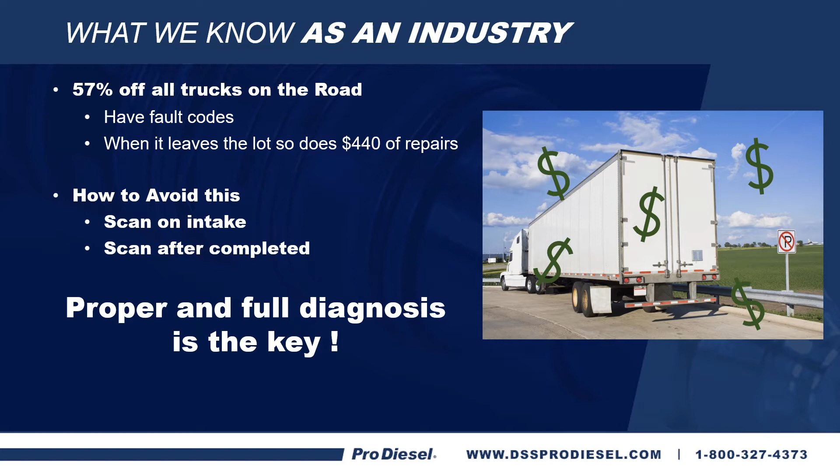One thing we know as an industry is 57% of all trucks on the road today have fault codes. When it leaves the lot, so does $440 worth of repairs - that's $220 in labor, $220 in parts. How to avoid this? Scan the truck on intake and scan the truck after completed. That gives you a full and proper diagnosis, which is key to making sure we diagnose what's wrong with the truck, get to the root cause of the problem, and make sure we're replacing injectors when they need it, not when they don't, and that we've solved the issue that caused the first set to fail.

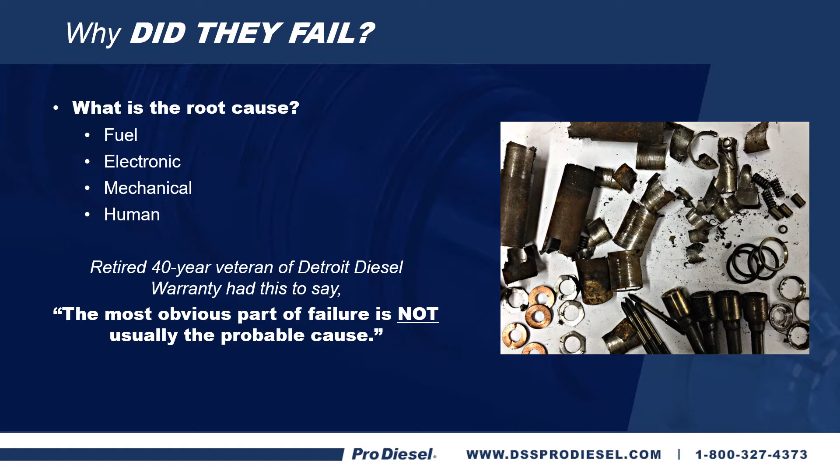Speaking about why they fail, what is the root cause? Is it fuel? Is it electronic? Is it mechanical? Or was it human error? A retired 40-year veteran of Detroit Diesel warranty said the most obvious part of failure is not usually the probable cause.

Why do injectors fail right out of the box? Well, 65% of all our ProVantage warranty returns are non-injector related issues. First, contamination. Second, O-ring damage - they're either cut, pinched, or rolled. They were improperly diagnosed, or it's an inherent OEM injection design failure. I always like to say a Yugo's a Yugo - we can only make it so good, it's still just a poorly designed injector. We can't change the design of that injector. So 3 of these are preventable during installation, and that's what we want to talk about today.

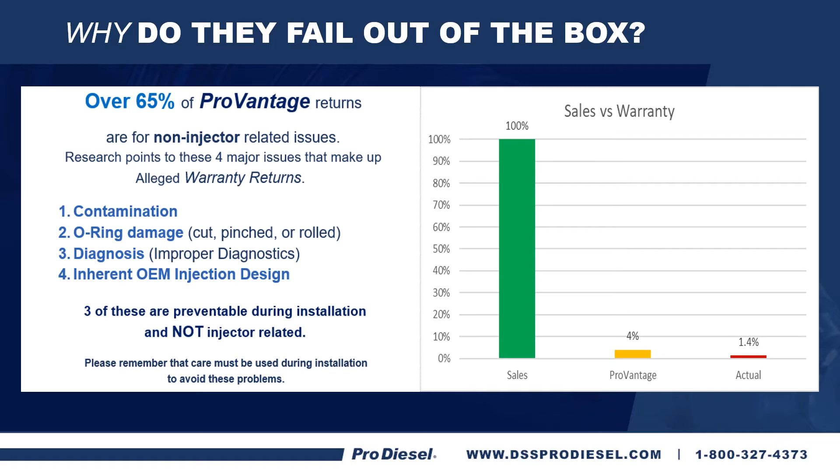What makes up the 65% of returns that we get back for warranty purposes that are not injector failures? 60% of that 65% is contamination.

Under that, let's talk about storage. Do you buy your fuel in bulk? Is it a reliable source? Is it the right type of fuel, highway or off highway? Are you putting the proper additives in it for that time of the year? Particulates - it's critical to remove these through filtering. We have a 5-micron tip in some of the electronic fuel injectors today, that's just a piece of dust - it takes 20,000 microns to equal an inch. Do you have water or microbes and sludge in there? Prevention is the most important part to keeping fuel-related issues out.

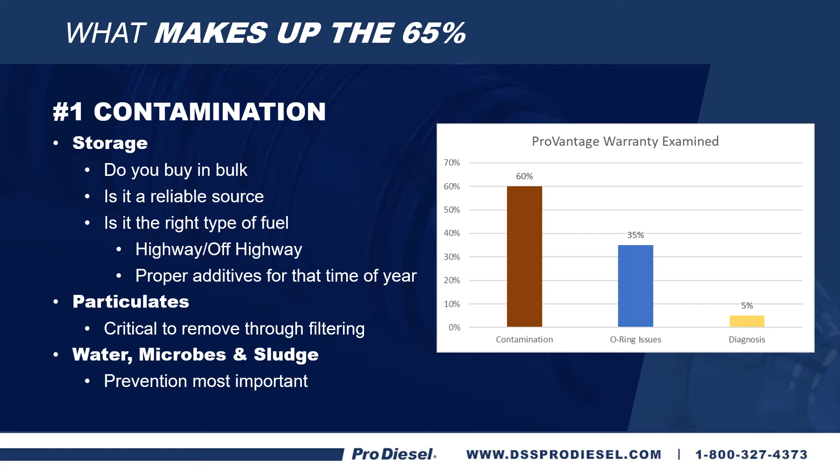A few questions to ask yourself. Have you checked your tanks lately? When was the last time your fuel was tested? Is it on a regular scheduled maintenance program? What can you expect if the fuel is bad? Have you checked for microbes? And which one is best for you, mechanical or chemical solutions to keep your fuel clean and up to date? And can you do it yourself, or do you need to hire someone?

It cannot be stated enough that the filter is the only way to make sure you get good peak performance out of your injectors.

Number 2 on our list of non-injector related failures is damaged injector O-rings, which make up another 35% of the returns we get back. This happens during installation, and is most common on the back cylinders with a cut, rolled, or flattened O-ring. We also get them from combustion heat, which results in fuel leaking into the engine or compression gases in return fuel.

Anytime you take an injector out, you need to make sure that you replace the O-rings. Don't reuse the O-rings. You should use a thin coat of ethylene glycol or petroleum jelly when you do the installation to keep them lubricated as they go in, so they do not tear, reducing the risk of getting cut. Make sure that they are properly seated as well. You don't want them out of alignment one way or the other. It will flatten the O-rings and cause other issues.

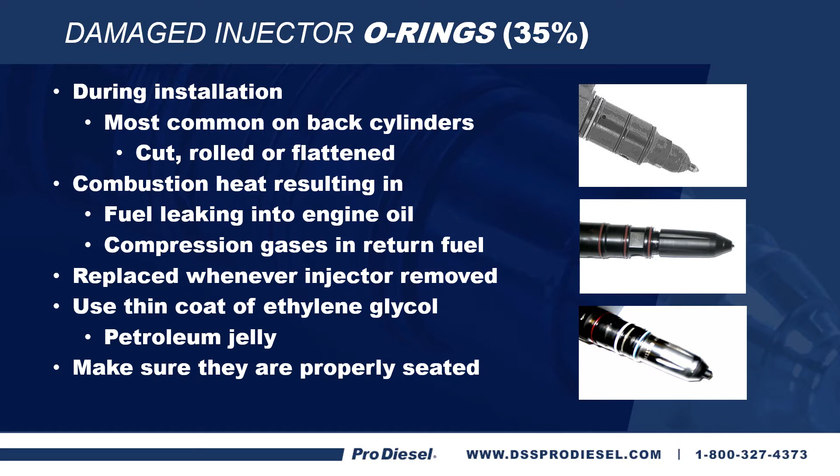The next in our list is just some common installation issues or misdiagnosis. It makes up the last 5% of our returns.

Starting with not checking the wiring harness. A bad harness will equal misfires, and you'll assume that it's an injector. When you replace the injector, you'll have the same problem. We get those back, and somebody ends up changing a wiring harness. Guess what? They fixed the issue, and it must have been the injector. No, it was the wiring harness to begin with.

Clean or replace the injector tubes. That will cause them, if they're bad, to leak or get blow-by. Check the electrical grounding. A poor ground will give you misfires as well.

On Cummins, the N14, M11, and L10, there's a bad part number: 30-3682. It causes misfires itself, so you need to replace that with a new updated version.

And on Cat C7s, the fuel pumps - Caterpillar requires, or requests, that you change those every 150,000 miles. They tend to disintegrate themselves, throw metal contaminants into the fuel system, and clog injectors. I like to say that fuel injectors are the most expensive fuel filter you'll ever buy.

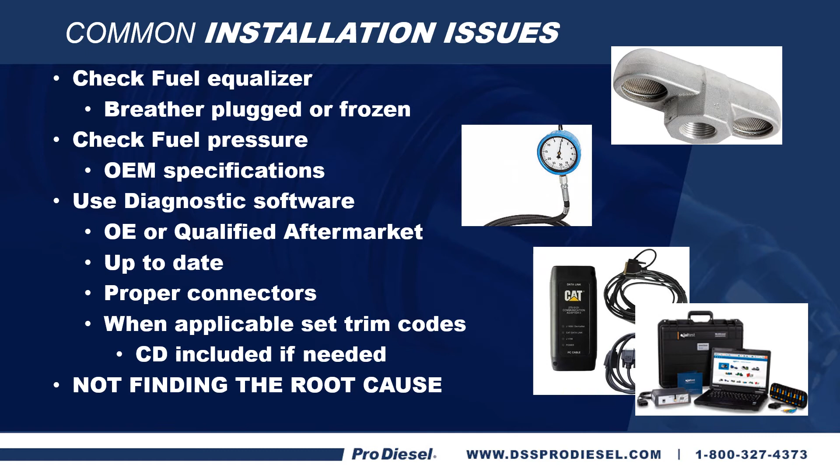Continuing with our common installation issues, you need to check your fuel equalizer. Make sure the breather is not plugged or frozen. Check your fuel pressure, make sure that it meets OEM specs. Low fuel pressure causes issues.

Use diagnostic software, OE or qualified aftermarket, and make sure it's up to date. Proper connectors - I used to sell diagnostic software, and I can tell you, if you don't use the right connectors, you get really strange information. Make sure you have the right adapter that goes along with it, so you're getting the right signal coming off of the truck. When applicable, set the trim codes.

The CD is included in everything that you need with our injectors. We use the OEM trim codes if you need them. If a CD is not in there, you don't need to set the trim codes.

The key here is to make sure that you're finding the root cause. That's why we get a lot of these back - people don't find the root cause when they install the injector, because the first one failed for a reason. Let's make sure that we don't put an injector back into a system that's going to fail it.

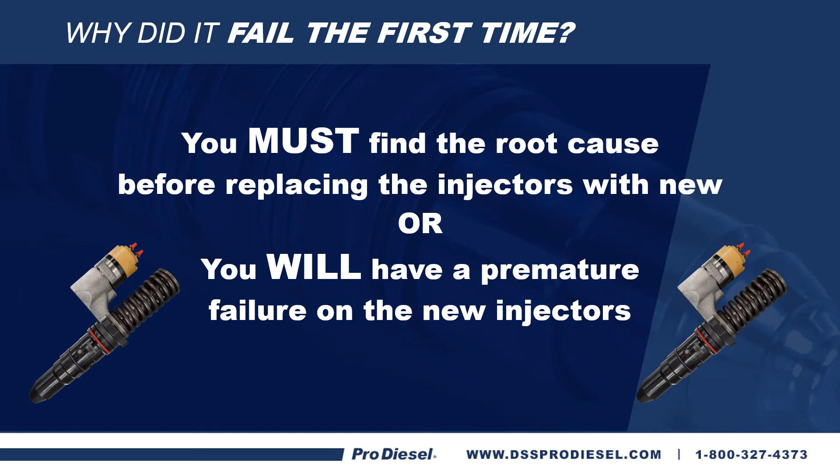Please remember, it is critically important that you find the root cause before replacing the injectors. What caused the injector to fail the first time? Was it contamination? Was it just worn out? Was there an electrical problem? You must find out why the first ones failed. Once you figure that out, you can fix that problem as well as replace the injector. The problem is, if you don't, you will have premature failure on the next set of injectors because the problem's still there.

For our next segment, we'll get into a little bit of injector technical training. We'll cover a little bit of diagnostics, some identification, talk about how we can ensure proper functioning, and how to manage the core.

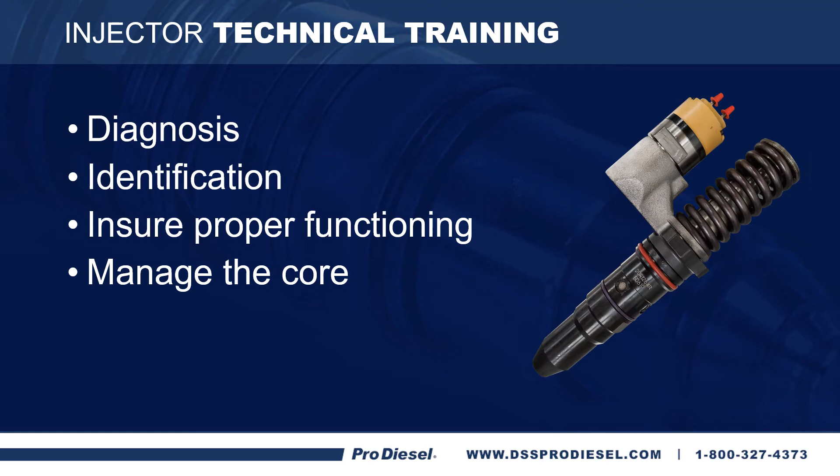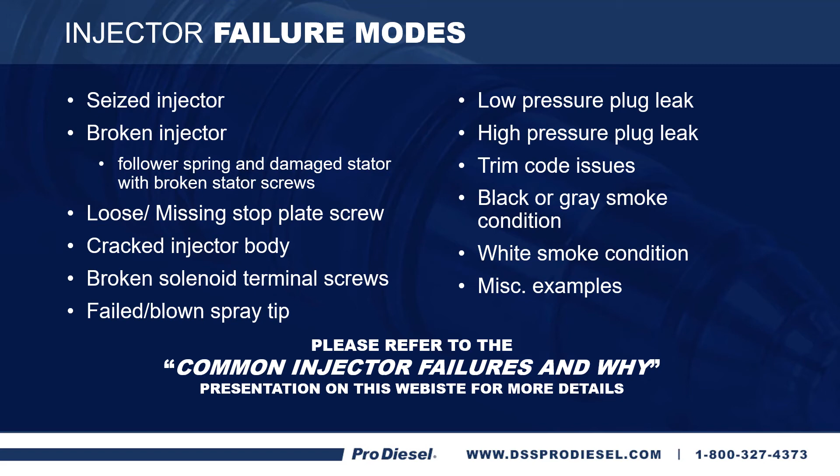Here you can see a list of injector failure modes. We'll not go into detail about each one of those. There's a separate presentation called Common Injector Failures and Why, listed on this website.

Let's talk about trim codes. Only certain engines from Detroit or Caterpillar need those, normally Caterpillar C7 and C9s, and not all of those engines in that platform need trim codes installed at the time. You will need OEM software or Cojali software to be able to do that. This must be done at the time of installation in order to have the engine run properly right out of the gate. If you need the CD, we will include it in the injector box. If you don't, we won't. Basically, if you get a CD, you're going to have to install the trim codes. If you don't need the trim code, that's just how we know which ones need it and which ones don't.

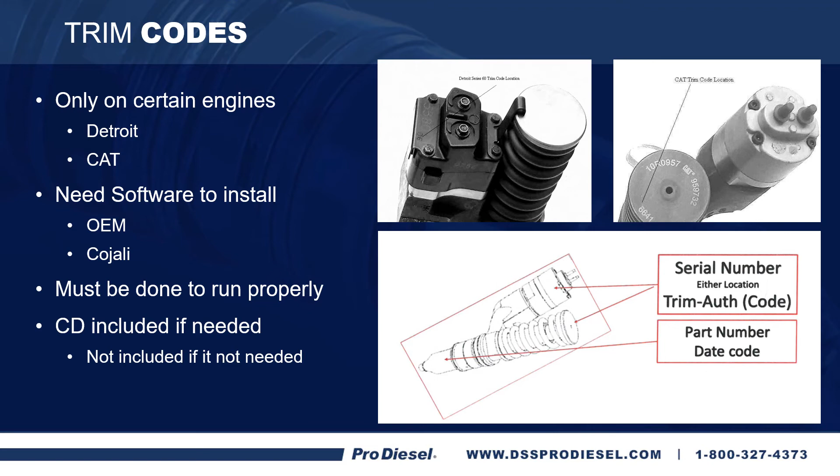Let's go into some CAT electronic injector installation and removal procedures. First, start by disconnecting the harness assembly. Mark the bridge assemblies and the injectors for reference during replacement. Each injector must be reinstalled in the original sleeve. Remove the bridge assemblies, remove the bolt, spacer, and clamp holding the injector in place. Inspect the hold down assembly. If the bolt is not loose during disassembly, use tooling to pry beneath the base and free the injector. Remove the injector from the cylinder head and inspect the injector bore for debris and signs of wear.

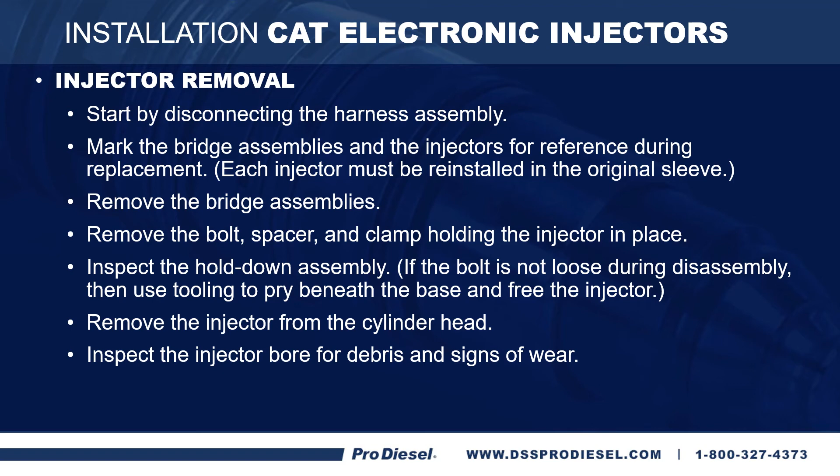As you install or replace the injector, remember to replace the clamp and spacer. Be sure to replace the injector hold down bolt with a new bolt. Clean the engine, internal fuel lines, and injector sleeve before replacing the injector. Install a new fuel filter and flush the lines. Please remember to do this. Again, injectors make very expensive fuel filters. If you don't clean and flush the fuel and change the fuel filter, you are almost guaranteed to clog that brand new injector that you took so much time and energy to put in.

Use the OEM service manual instructions for servicing or replacing the injector cylinder head sleeves. Before installing the injector, apply clean oil on the O-ring seals to prevent possible O-ring damage. Do not strike, hit, or hammer the injector before or after installation.

International HEUI injectors have a common problem of split tip failure. The reason for this is you've either got low fuel pressure or air in the fuel. Understand that fuel provides a hydraulic cushion between the valve and the valve body. Dry starts can and do result in hard striking of the valve, causing the tip to split. Understand that split tips will happen no matter what brand if these conditions exist. So whether it's ProDiesel, an OE, or whatever, you will split the tip on your injector if you do not make sure that there's good fuel supply.

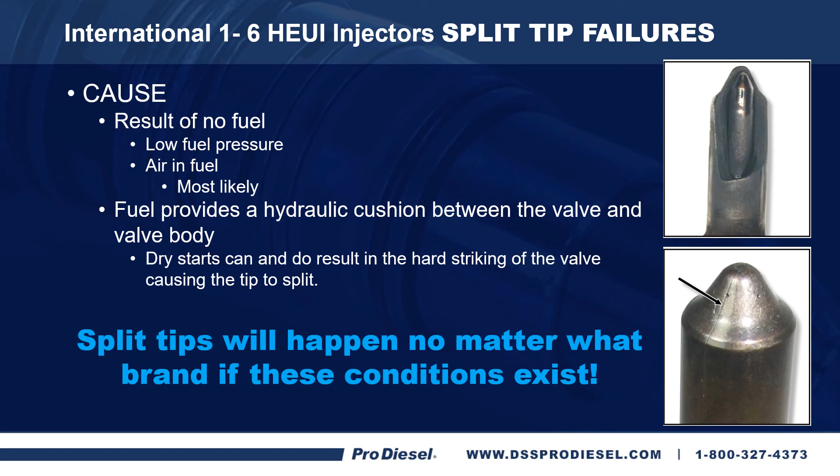Some things you can do to prevent split tip failures: prime the engine before starting, and operate the engine with proper fuel pressure. If you have excessive fuel inlet restrictions, a maximum of 6 inches of mercury at high idle, you need to replace the fuel filter, clean the fuel strainer, check the lift pump and overflow valve. Make sure you don't have air in the fuel. This can occur in the suction side of the fuel system, the lift pump, loom clamps, fittings. Make sure you've tested and checked all of that, or when you start up with air in your fuel, you will split the tips.

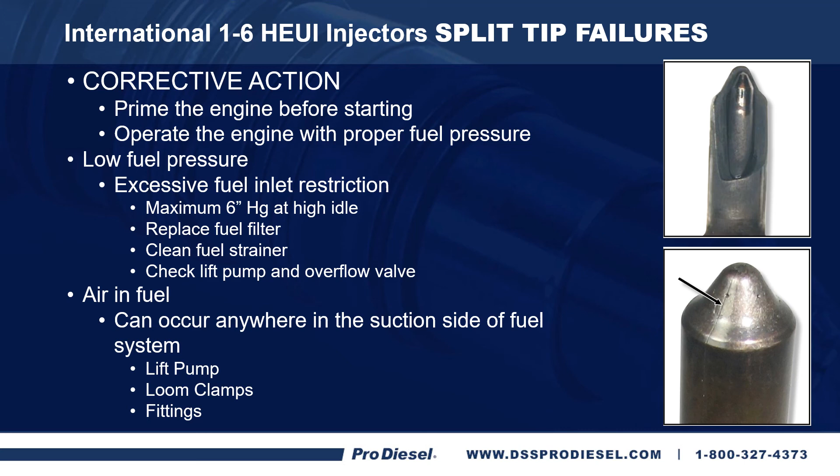Let's go over some common practices. Before installing replacement injectors, determine the root cause of the failure. Correct any possible contamination issues, such as metal from a failed high pressure pump or poor fuel handling. Flush the system before installing and running the replacement injectors. Please do not remove the injector from its protective packaging until ready to install. This will reduce the likelihood of contamination or external damage.

We're not talking about common rail injectors here, but they have a 5-micron hole in the tip that will clog with a piece of dust. So it's almost like sterile technique for nurses. You guys have to be really good about keeping your hands clean, flushing the fuel system, making sure you've got new clean filters in it. Do all that before you put a new set of injectors in. Make sure your injector has the best opportunity to start off right.

Install the trim codes from the CD-ROM if it's required. Prevent injector plunger spring failure by priming the fuel system before you start the engine. And please, deviating from the OEM recommendations can result in premature injector failure as well.

Let's go ahead and talk about how you handle your core. Getting that core back to us and getting the credit for it is important to you and important to us. If the tip's blown off, if the spring's busted, for whatever reason, we need the body of that injector back. So please put it back in the Ziploc bag that's in your box that you just purchased the ProDiesel injector from and send that back to us. We'll give you credit for that, no problem.